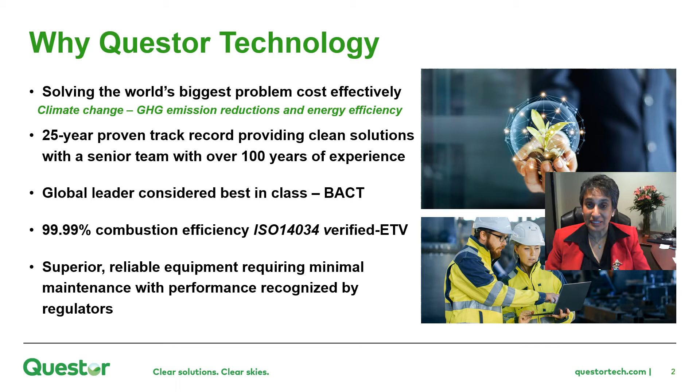We provide solutions to many industries like agriculture, food processing, landfills, biogas, wastewater treatment. We can then take the waste heat we generate and other waste heat from industrial operations and convert that using our organic Rankine cycle technology through our subsidiary ClearPower to generate power in the range of 50 kilowatts all the way to 5 megawatts. And with data monitoring, we can help our clients demonstrate to their various stakeholders that they are in compliance and they have significantly reduced their greenhouse gas emissions.

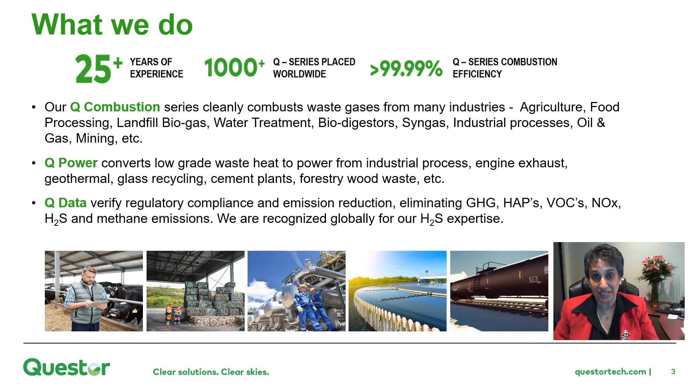When we look at creating value from waste, on the combustion side, our high efficiency allows us to guarantee that the only emissions coming from the top of our stack is CO2 and water.

With that waste heat, we can generate power, as I mentioned before, but we can also use that waste heat to treat water. Many people think about water treatment as taking the impurities out of the water. Because we have an abundance of waste heat, we're able to take that heat and remove the water from the impurities so that you only have to handle less than 15% of the total volume. The water that we remove can be condensed and reused or allowed to stay in the ecosystem so that it is a much more sustainable way of dealing with wastewater.

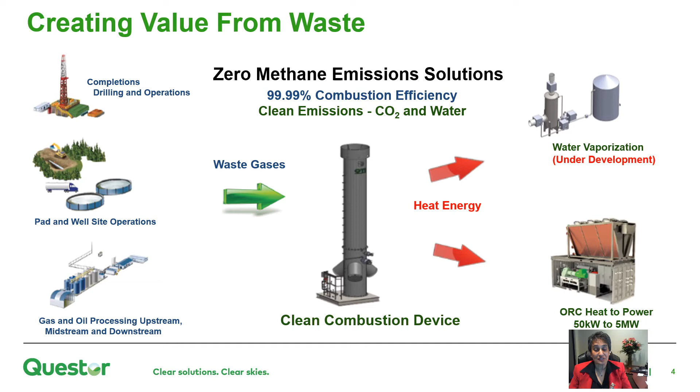If you look at the opportunities and problems that we're solving for our clients, the first one is emission reduction, whether it's through regulation, a push from community, or commitments companies have made to get to net zero. The second area that we help our clients with is getting community acceptance and supporting them in their ESG initiatives. You can see from this picture that we have a unit in the middle of a playground in Colorado.

The third reason that our clients look to us is to help them reduce costs and provide a safe way to deal with waste gas. What you're seeing there is 3 large units at a rail car loading facility.

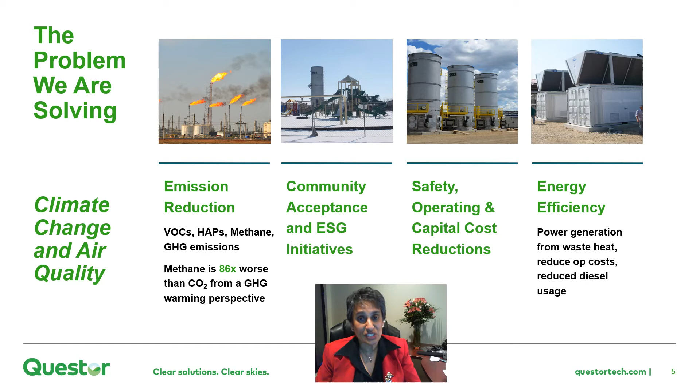Finally, one of the key opportunities to help us reduce emissions is to improve our energy efficiency. So we can take a multitude of heat sources that are currently wasted and convert them to power so that the site can be self-sufficient, eliminate diesel power generation if it's not near the grid, or stop pulling power off the grid to generate their own energy.

I mentioned before that we had received ISO certification. What you can see on this slide is a selection of tests done by one of our clients, which shows that we have 100% efficiency.

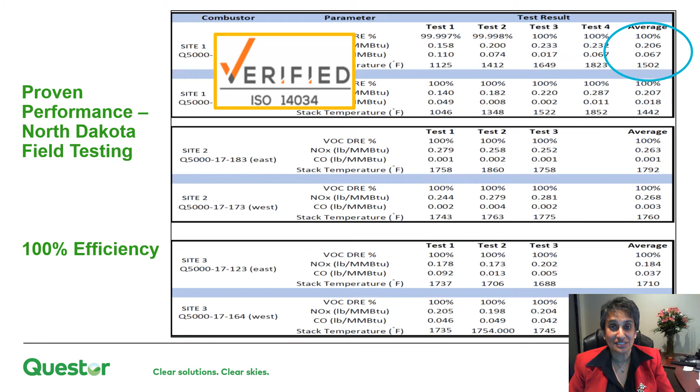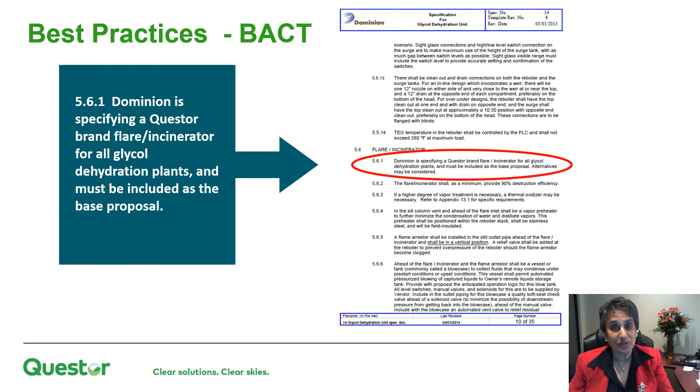This reflects best practices for some large companies who require their staff to use our equipment when dealing with emissions. For example, Dominion has us in their dehy spec because for their field guys, this was the first time they had a unit that worked so well that you press the button to start it, and that was the last time you had to touch it.

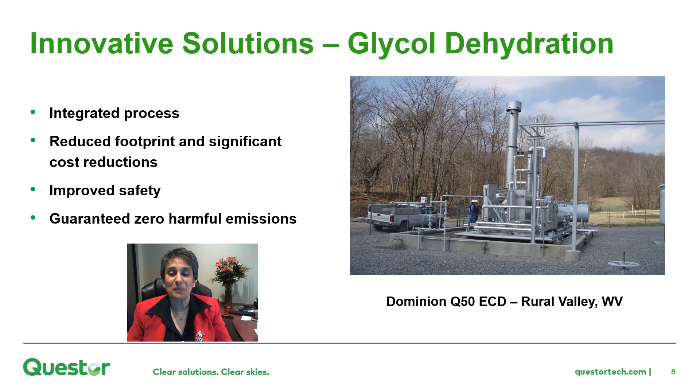This is a quick example for our client Dominion. What we've done there is integrated our technology with theirs to reduce the footprint, significantly reduce costs, improve safety, but most importantly, guarantees zero harmful emissions.

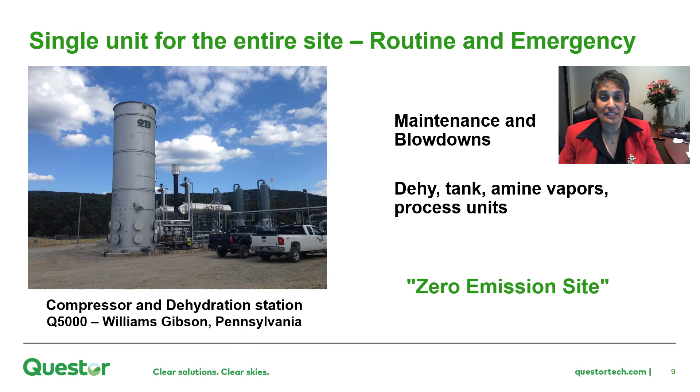Finally, we also have equipment that we have made portable with a patented hydraulic trailer, which allows us to easily move these units and set them up in less than 10 minutes. The trailer can then detach from the unit, leave, and when we're ready to move this unit, the trailer can come back and reattach it. We've reduced crane and picker costs and of course improved safety at site.

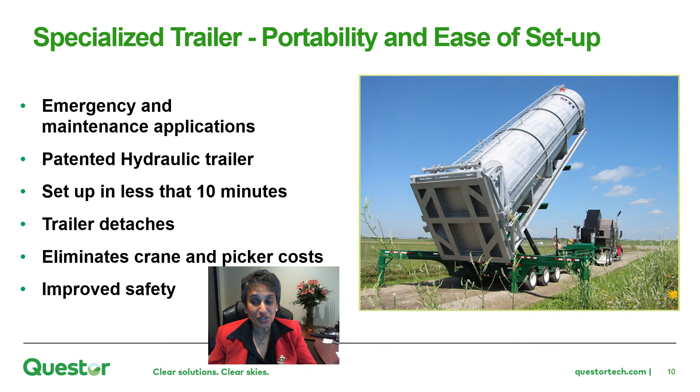In the energy efficiency space, we have technology that allows us to generate power from a multitude of waste heat sources. So the waste heat can come from our combustion equipment, or from industrial operations where we recover the heat and eliminate cooling towers. And then finally, it's in combination with a turbine to improve the efficiency of a turbine.

In this case, you've got an example where we've got a 3.5 megawatt turbine, and partnering it with our 1.5 megawatt organic Rankine cycle power plant, we're able to generate about 5 megawatts of power.

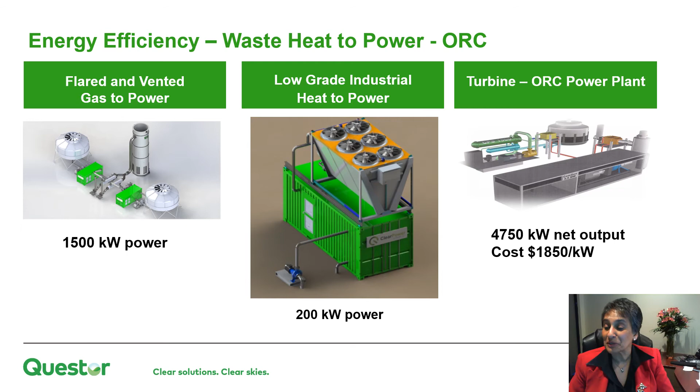This is just a quick example at a biodigester in agriculture where we're picking up waste, and the biogas that's generated from this waste is combusted and turned into power for that site.

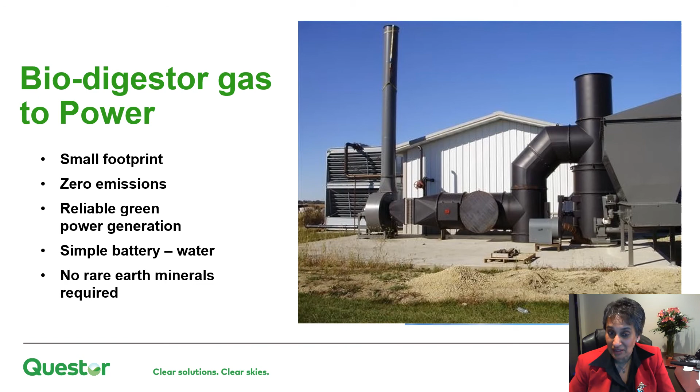The beauty of looking at waste heat to power is it also has zero emissions, just like solar and wind. The footprint is small, it's reliable, it isn't dependent on the wind and the sun. The battery is very simple, it's a water tank, and we don't need any rare earth minerals.

Finally, as I mentioned, data gives us transparency, and it allows our clients to monetize the carbon offsets they generate for trading. And there is a very strong carbon trading market, but in addition, it allows them to guarantee to their clients that they are providing the lowest carbon molecule, in other words, the cleanest energy possible, because they've dealt with emissions by using technology.

And we monitor all of these units around the world from our Emissions Excellence Center in Calgary.

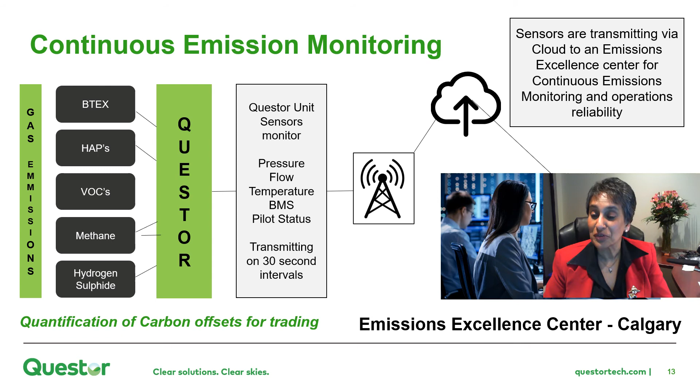What we're seeking today, and I thank you for listening to the story about Questor, but we're seeking strategic clients who we can support in their ESG goals. We're looking for strategic alliances. We would like to have a base in Taiwan to expand into the Asia Pacific area. We're looking for sales support globally, fabrication to serve our Asia market, and finally partnerships.